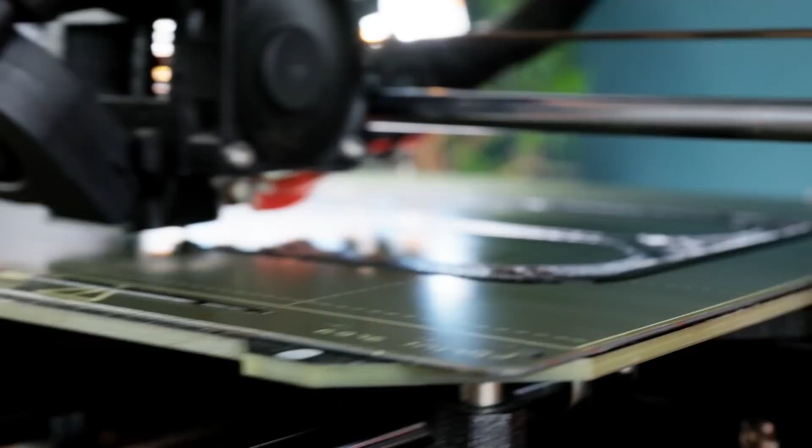Building homemade speakers that can compare favourably to manufactured units that have all manner of built-in digital signal processors, precisely tuned ports, and computer-calculated internal air volumes is hard. Simple boxes just aren't going to cut it anymore. However, 3D printers might be able to help here. Their ability to make complex shapes with millimetre precision is perfect for making computer-aided designs.

But there's a bit of a problem in that thin extruded plastic is acoustically not that great. As it's low in mass, it vibrates and resonates easily, which is awful for sound quality. If this basic enclosure, for example, is measured with a calibrated microphone, we can see this resonance appearing in the 100 to 500 Hz range, and it presents as distortion.

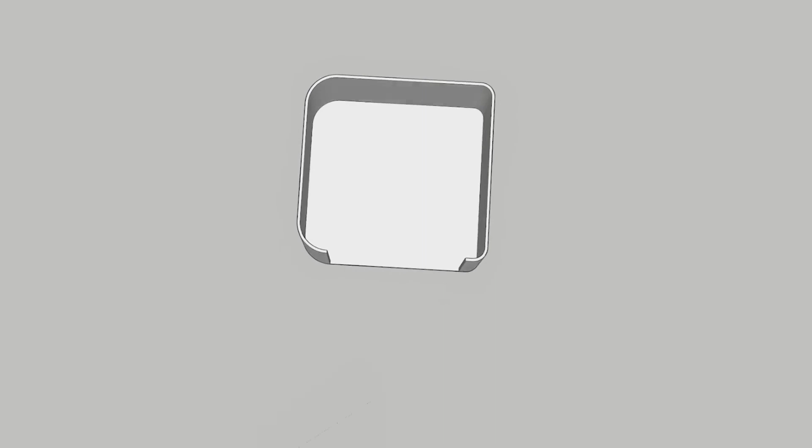Making the chamber walls thicker would of course help here, but it would require a lot of filament and take days to actually print. However, what if we print only a hollow shell and then use it as a form mould instead? Doing it this way results in speedy print times, as the filament only has to be deposited for the shell, with a large internal gap left for a filler material. A cheap and readily available option for this filler material is of course plaster of Paris, which can be added to water to make a paste that sets hard.

It does have a problem for sound applications though, in that it's a very brittle material, giving it a ringing quality a bit like a teacup. This has the potential to sound worse than the plastic alone, but there is a way to fix it by adding PVA glue during the mixing process, which changes this quality entirely, and the difference between the two is night and day.

I believe the addition of PVA creates a microscopic level of flexibility, reducing its brittle nature and making it behave like a much duller sounding material, perfect for using in our 3D printed mould, which once dried is way more solid than our previous version.

These new thick chamber walls reduce the 100 to 500 Hz distortion significantly, which is great, but as the enclosure is so much stiffer now, there's a new problem to contend with: internal reflections. You see, when a speaker driver moves back and forth, it sends sound waves not only forwards towards the listener, but also backwards into the enclosure. An ideal enclosure is supposed to prevent these sound waves from escaping, which our solid enclosure now does a decent job of. But as these sound waves have nowhere else to go, they bounce around and eventually hit the back of the speaker driver again, colouring its output due to the time delay.

This is less than ideal, but adding soft materials to the inside of the enclosure is a good way to dampen these reflections. Here I'm going with some soft automotive acoustic pads, followed by a folded layer of cotton towel and then some sheep's wool, which will all act together to stop the sound waves from being reflected back. And overall, compared to our original thin enclosure, we've gone from this to this.

Further improvements can be had by utilising higher quality drivers, which we'll be diving into later, but essentially this forming technique has made 3D printing a viable option for hi-fi sound quality, which is really exciting because we can now use their ability to make complex shapes to our advantage. And one area in particular that's going to benefit a lot from this is the subwoofer frequencies.

You see, if we replace the enclosure with a long tube, it will keep the rear sound waves contained only until they exit at the other end. Due to the time that this takes, it essentially delays the audibility of these rear sound waves just enough for them to become additive rather than subtractive to the driver's forward sound waves, which makes far more use of the speaker's energy.

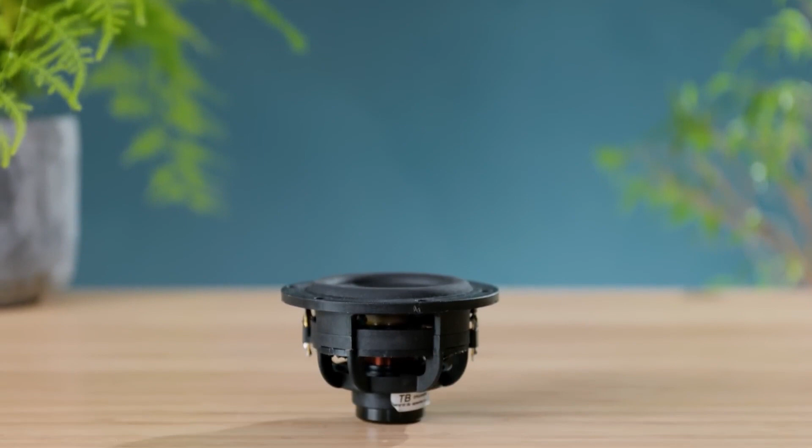One notable subwoofer that's become somewhat of a legend in this configuration, mostly thanks to fellow YouTuber Hexibase, is this 3-inch unit from Tang Band. Despite its diminutive size, it should go down to the low 40 Hz range, which is insane for such a small driver.

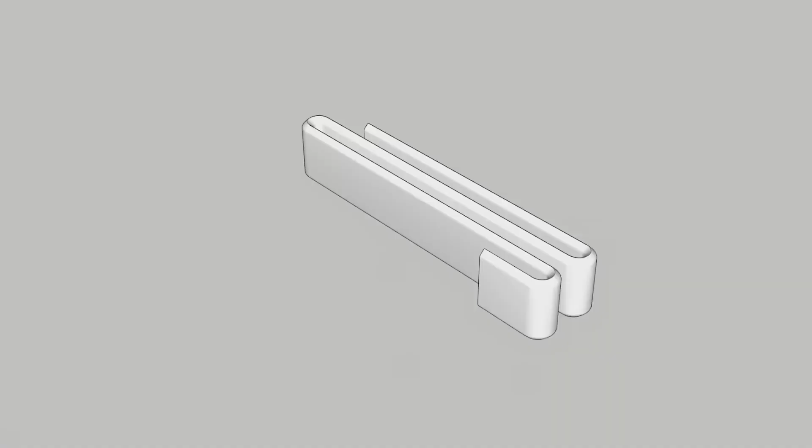Calculating the required dimensions for this to be done properly can be done with a piece of software called HornResp, which can map out the predicted response, allowing us to get two key measurements: the tube length and the area of its cross-section. The 1.4 meter length required for this is rather long, so it can be made into a folded configuration to make it more compact so that we can actually print it off with the 3D printer.

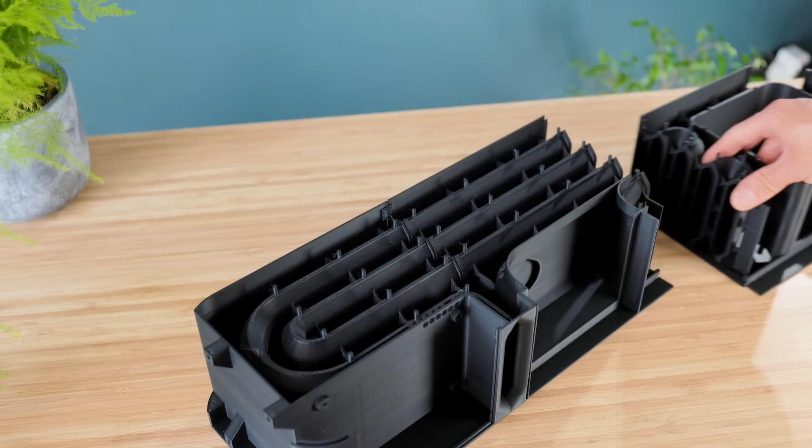Again, in an effort to reduce print times, I'm making this design entirely hollow, with the goal being to fill it with our special PVA and plaster of Paris mix. As it approaches 60 centimeters in height, it's necessary to split it up into 3 individual sections so that it can be printed with the widest variety of printers. And as you can see, I've included a sealed enclosure above it all for a dedicated midtone driver, as the subwoofer isn't really very good at reproducing these tones.

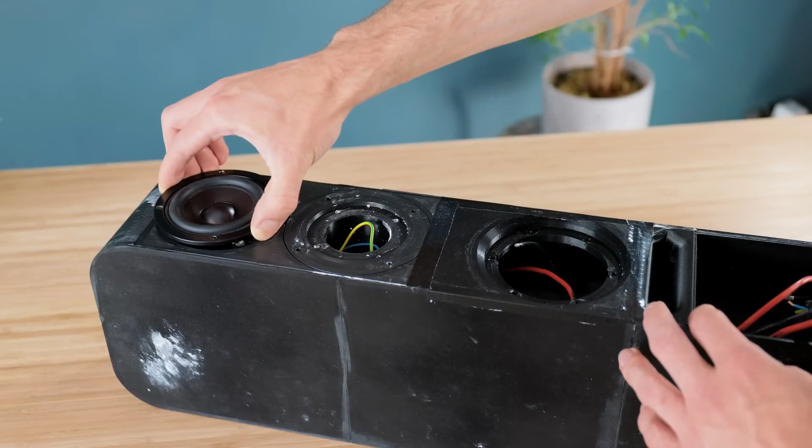Filling this whole thing with plaster of Paris can be done through a hole at the top, though it does need to be knocked repeatedly to make sure that there are no air pockets. This makes thick walls around the subwoofer port and the midtone chamber, and it makes the unit extremely heavy for its size, but it does feel high quality for it and very solid. During testing though, I found that subwoofer notes, while extremely deep, weren't as loud as I'd like.

Now, being me, I'm not satisfied with this yet. I want to take this design as far as we can possibly go to make it the ultimate 3D printed speaker. And to do this, my conclusion is to add yet another subwoofer driver. This doubles the surface area that's going to be providing bass and should hopefully solve the issue. But it does come with its own challenges, namely that we not only need to find space for the driver itself, but also the port has to literally double in dimensional volume. And if I want this thing to remain the same size, that's going to be a massive challenge.

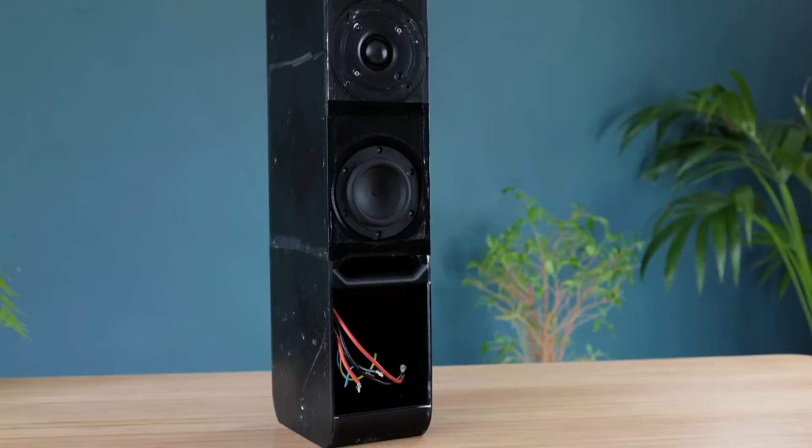But to be honest, the solution is annoyingly obvious. You see, in an effort to have enough room for the plaster of Paris to form good solid boundary walls throughout the speaker, including those surrounding the subwoofer's port, I forgot to ask myself whether they were all necessary. You see, the whole point of this subwoofer tube is to redirect energy, not contain it. As the end is open, its walls really don't have to be as thick as I've made them, because they don't have to hold in any energy, they merely direct it through.

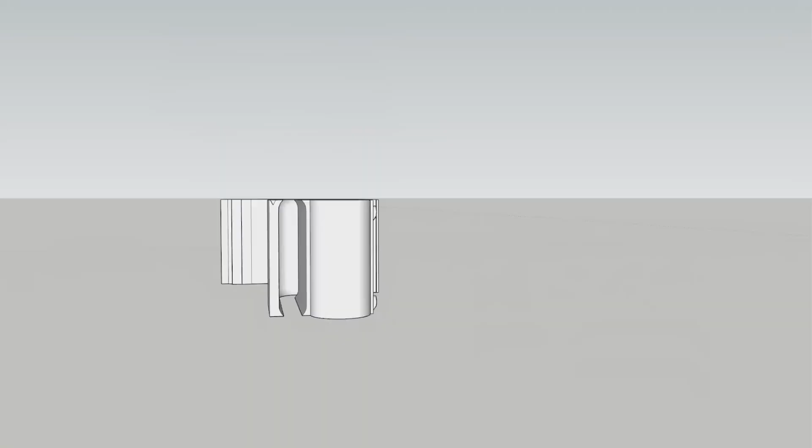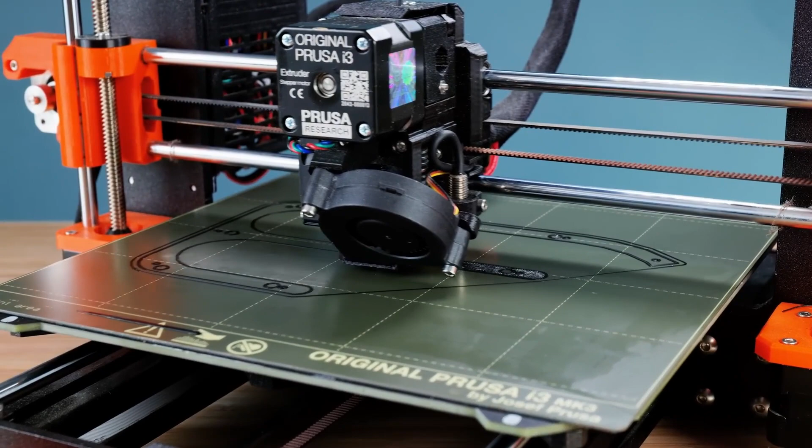With this in mind for the second attempt, I've decided to remove the need for plaster of Paris for the subwoofer's port entirely, and instead have gone with 4mm 3D printed boundaries, which saves just enough space for the now much wider and longer port. The downside is that it consumes twice as much filament and takes twice as long to print compared to the original, so let's hope it's all worth it.

So a few days of print time later and we've got everything printed off, ready to be mounted together. Now this is a relatively simple process due to the way it's been designed and divided up, but we do need some glue. Now this isn't actually for anything structural, it's just to form an airtight seal between the different layers. So let's get to it.

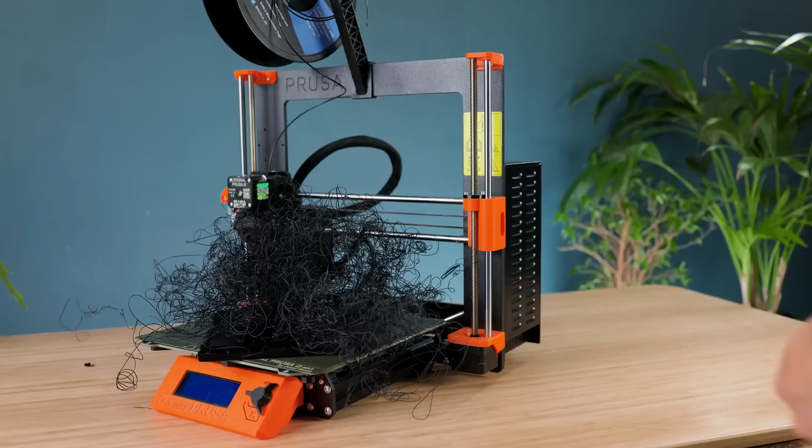Now, time to get gluing. As you can see, the biggest change from the original design is how it's been divided up for the printing process, with smaller individual parts rather than 3 big ones. This has been done to reduce the likelihood of printing failure by them popping off the build plate before they complete, though if you do want to print a set of these yourself, do note that it's still important to clean the build plate and apply some school glue for the best adhesion.

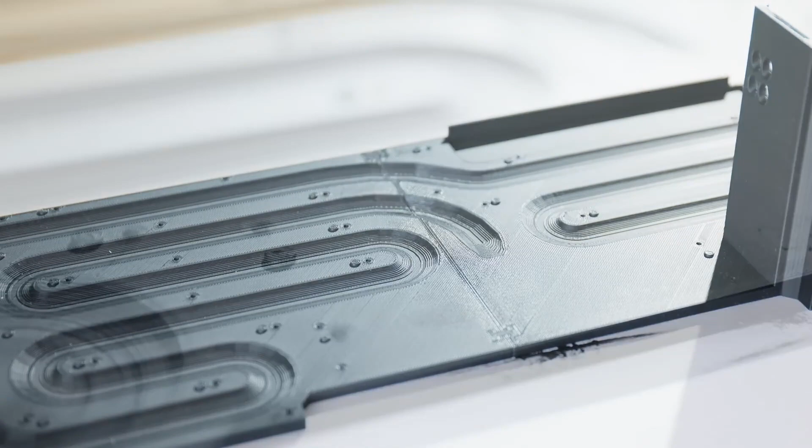Once everything's successfully printed, build platforms 1 and 2 can be glued together first, utilising a couple of H-clips to make sure that they're nice and tight. As you can see, the glue has a tendency to squeeze all over the place, but it's easy enough to wipe away any excess. Now you'll have probably noticed that these pieces have many small discs on them. These are actually centering guides, which line up with the subsequent pieces, making them easy to position accurately.

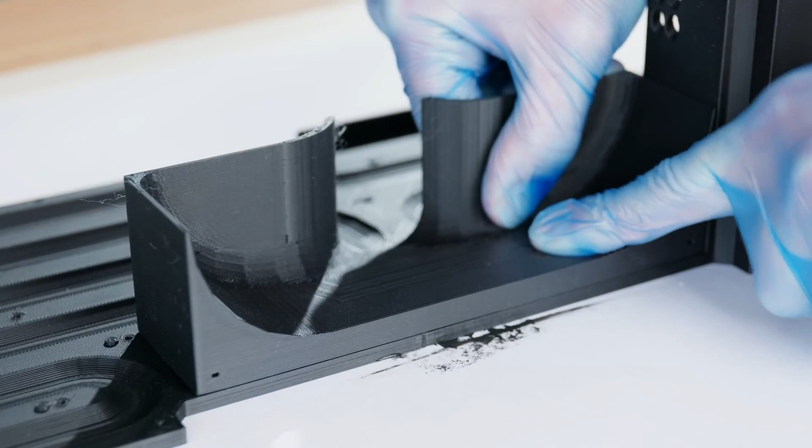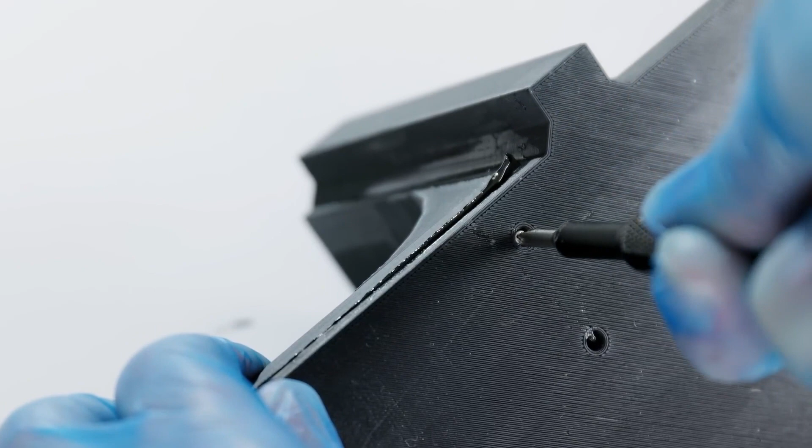Here I'm adding the bottom part of the subwoofer's chamber, and if we flip it over we can see that there are 4 holes beneath it. These are for 2mm diameter self-tapping screws, which allow us to clamp the pieces together. From here the internal air guides can now be added, starting with piece A. This just needs a thin bead of glue along the bottom, as well as any vertical seams it touches. The guides help a lot in positioning it correctly, after which the screws take over.

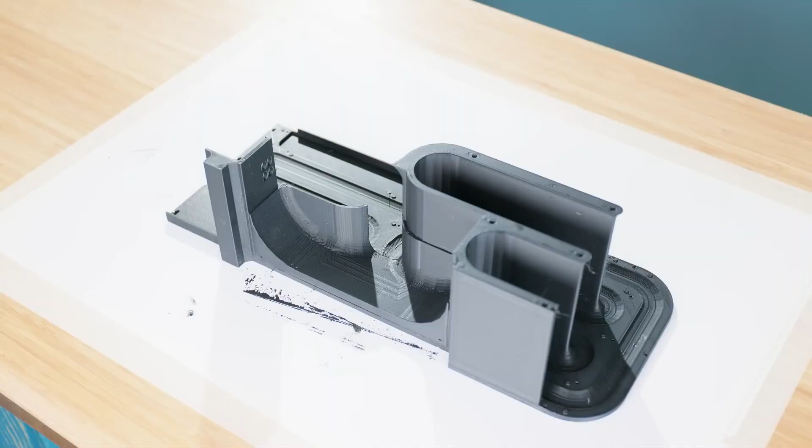It's important to ensure adequate glue here for a tight seam, keeping in mind that any spillover can be easily wiped away. This process needs to be continued with all of the internal air guides, which completes the subwoofer's tuning port, allowing us to move on to the midtone chamber. As you can see, this is the only section that has carried over the hollow forming technique, as it's proven so effective for midtone use.

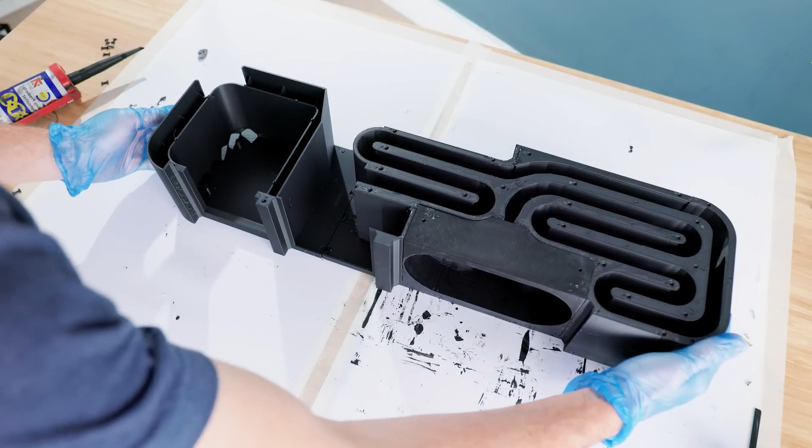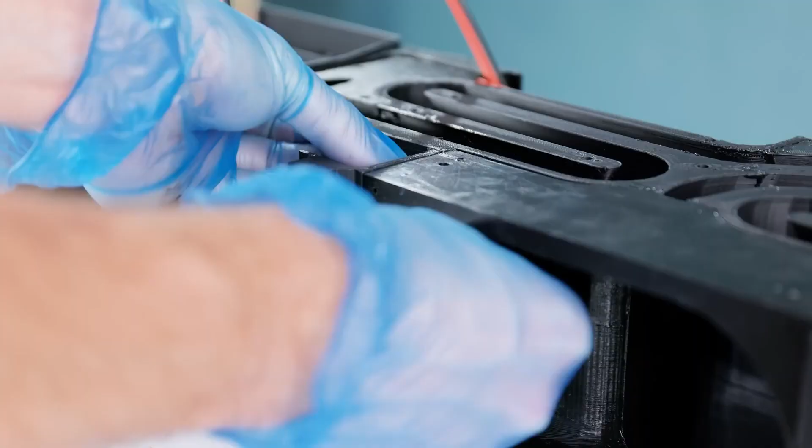For a nice strong link, this final platform can get extra support from the subwoofer's exit port, which, as you can see, has a wiring guide in its top half. There are a total of 4 pairs of wires that need to be routed through this: a pair for the top chamber, a pair for the middle chamber, and 2 pairs for the lowest subwoofer chamber. The holes for these, of course, all need to be sealed up so that no air can pass through.

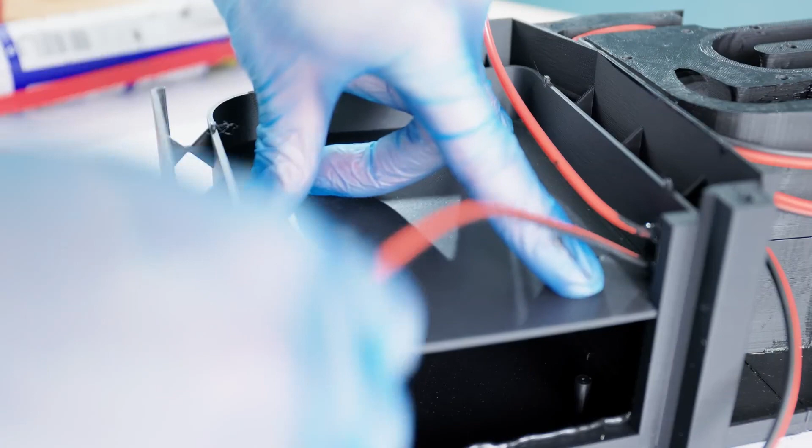With that done, the hollow cavity below the midtone chamber can now be covered, ready for the PVA and plaster of Paris mix in just a moment. But before we do that, we might as well add the chamber's dampening materials at this stage while we have easy access to it. Again, this is just a layer of 15mm thick automotive acoustic foam, followed by a folded layer of cotton towel, and then some sheep's wool. If you can't find any sheep's wool, by the way, loosened rock wool can also be used here, which is something that you can find in most hardware stores.

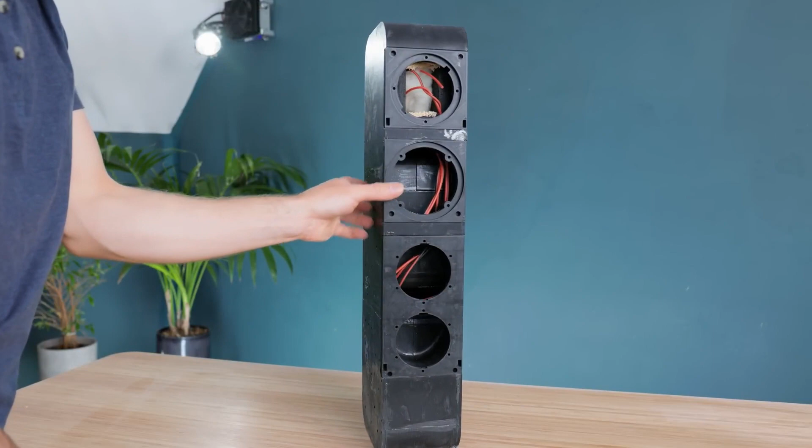All this being done means that we can finally cap the unit off with its top lids, as well as the brackets for the speakers themselves. It's worth noting that these being separate is intentional, as it means that the design can be easily adapted to different speaker drivers. So to finish things off, it's time to make what will hopefully be our last batch of PVA and plaster of Paris.

While plaster of Paris is generally safe, it does need to be respected as it can set quickly and generate some heat while doing so. Make sure you read the safety notes in the video's description before attempting to use it. The quantity required for our pour is 750ml of water that's already been mixed with PVA at a ratio of about 10 to 20%. This can be followed with 1 kg of plaster of Paris powder, which needs to be mixed in gradually.

Once a smooth consistency has been achieved, it can be poured into the chamber at the back, which completely surrounds the midrange chamber with a solid 16mm thick wall. It doesn't take too long for this to set, after which the rear can be closed up with a little cap.

Now technically the enclosure is ready for the various drivers to be mounted, but aesthetically, I think there's room for improvement, especially as not everyone is fond of the 3D printed look, particularly when there are joins that are still visible. But thankfully, there are loads of different techniques that we can utilise to make this thing look really special. To make the joins less of an issue, they can simply be filled and then thoroughly sanded down.

While this can be done by hand, it's worthwhile borrowing a disc sander as it saves so much time and it gives a really smooth finish, ready in fact for some paint. Some plastic primer can be used here first, as it gives a good key for the top coat. There are loads of cool finishes available these days, and I'm going with a textured paint that looks a little bit like metal. A far cry from the original printed plastic, that's for sure.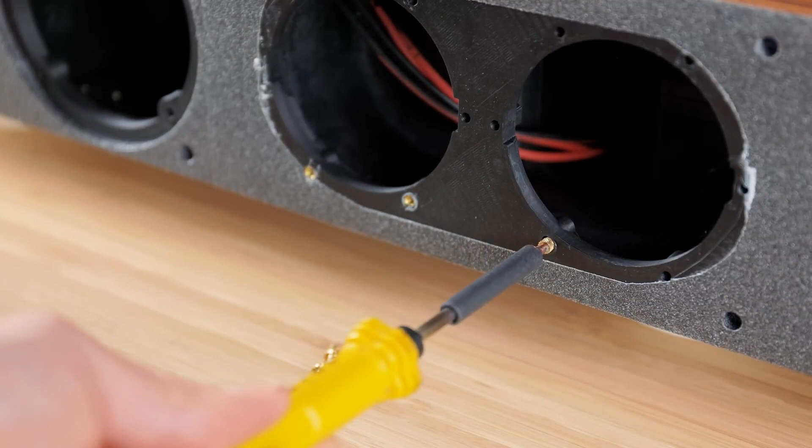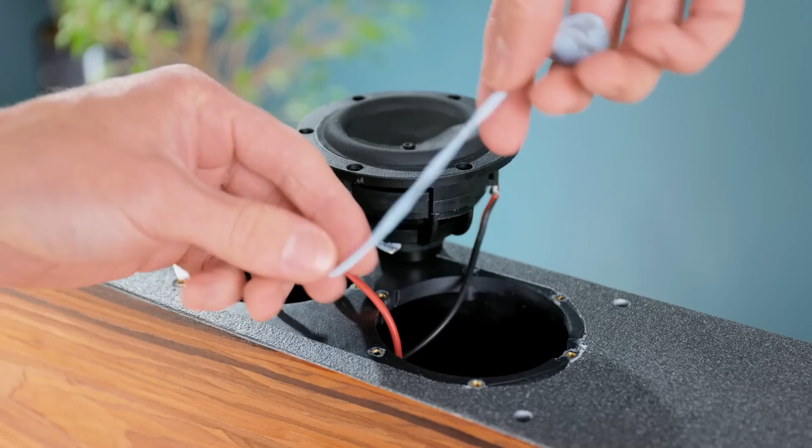To prepare for the mounting of the speaker drivers, the holes for them need some little M3 threaded inserts, which are for screwing them in place. When wiring them up, it's worth noting that the polarity of each speaker needs to be correct, with the red wires going to the positive terminals. One often overlooked but very vital addition is to add a rim of Blu Tack around the edge before the driver gets screwed in place, as this makes an airtight seal for it.

As you can see, they are slightly proud rather than flush, so to make them aesthetically more pleasing, they can be tied together visually with a little bracket. Very nice. So with the 2 subwoofer drivers now installed, it's time to tackle the midtone driver. Choosing a suitable one is somewhat daunting, as there are literally hundreds of different models available, each with wildly varying performance characteristics. In an effort to select the best possible driver for this project, I spent literally days testing various drivers, ultimately settling on this one, which is again a Tang Band unit.

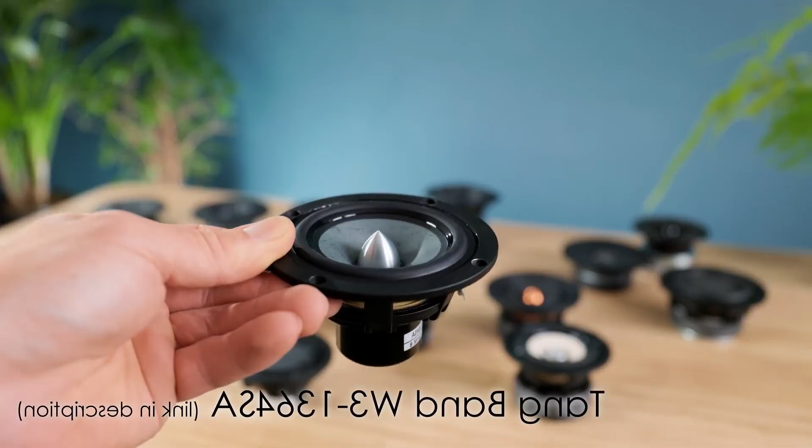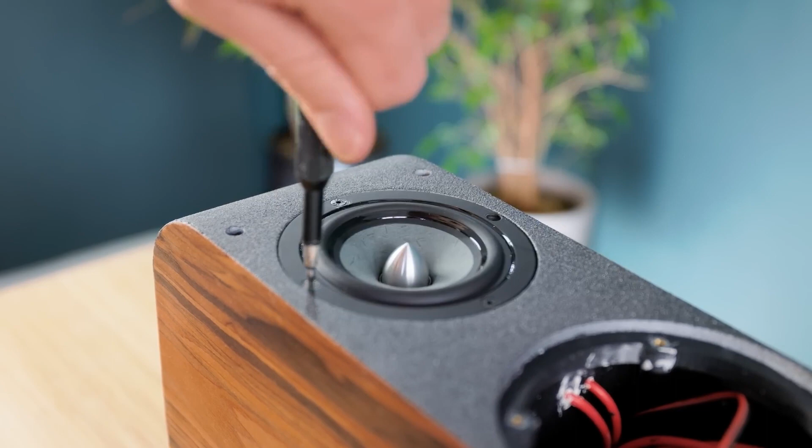It's got a nice smooth character to its sound output with plenty of mid-range detail, and it looks really smart to boot. An amazing feature of this driver is that it can actually cover high frequencies as well, so it can pull double duty as a tweeter, which is great for those on a tighter budget. For those who want the absolute best high frequency detail, however, the design does cater for dedicated tweeters, though they'll only likely be appreciated by the most demanding of listeners, so it's your call whether to include one or not, as the speaker can be printed without the hole.

Either way, with all of the drivers added, it looks really elegant, and it's easy to forget that it is in fact 3D printed. Now, some people might prefer the drivers to be covered, which is why I've included these holes. They're for a grille, which can be made by gluing some threaded steel rods to some mesh, which can in turn be held in front of the speaker with some 3D printed pegs. You could even paint it black for a different look.

An optional extra I've included for hi-fi buffs, by the way, are some side baffles. I embedded magnets for these before the painting process, which allows them to be easily added or removed, and the idea is to provide a smooth surface for the sound waves to spread out on. To describe the effect, it's like the sound gets projected forward slightly with them, but it's only a tiny difference. Still, the option's there for those of you who want it.

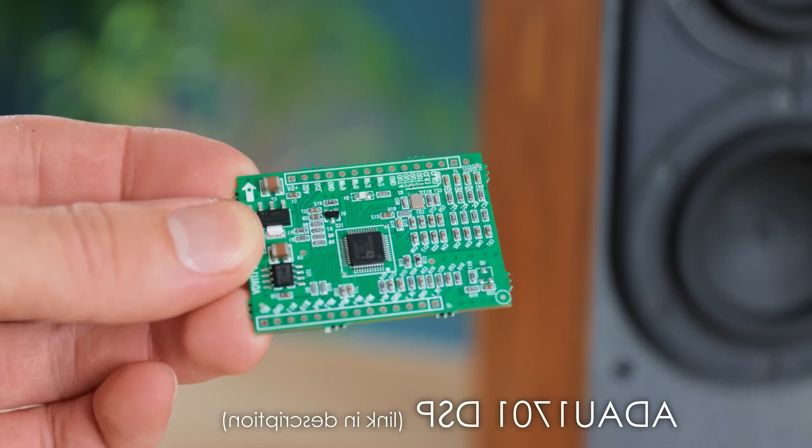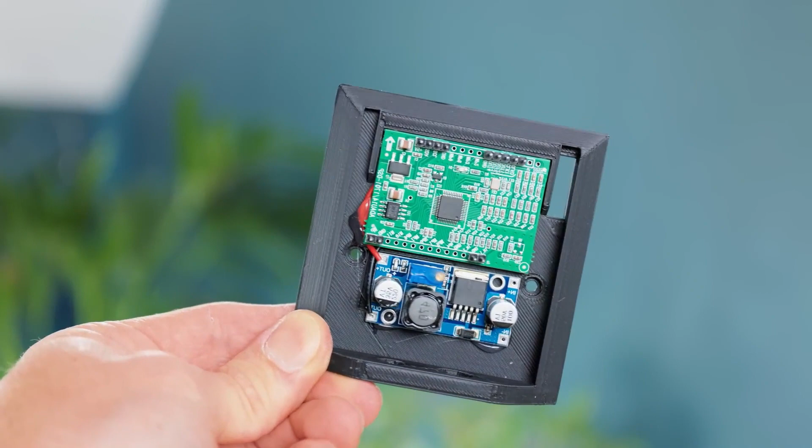Now, to get the very best possible sound from this thing, we're going to need some help from our secret ingredient, a digital signal processor. Shockingly, these are really cheap to buy now and can provide 4 fully programmable sound outputs, allowing it to function as an advanced crossover. To make use of it, we can simply mount it into a little 3D printed box along with a voltage regulator for power.

It's going to get its audio signal from a phono socket that can be inserted here, alongside a DC barrel plug. This essentially takes the audio signal from the phono socket and internally splits it up into 4 separate signals with specific processing for each. As the board can't do any amplification though, it needs to send these signals to a 4-channel amplifier.

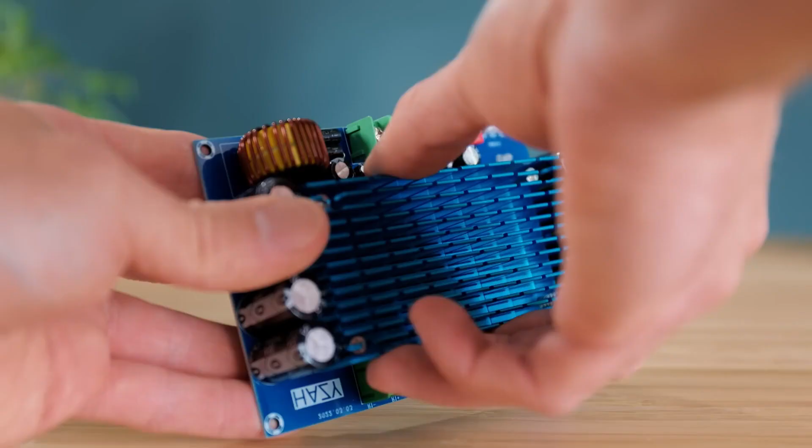The one I have here is a Class AB type, which uses slightly more power than Class D amplifiers, but it has a very low level of output hiss, which can be at annoying levels on so many other amps. There is of course a ready-made chamber for it on the back of the speaker, and each driver wire pair needs to be hooked up to it, being careful of polarity.

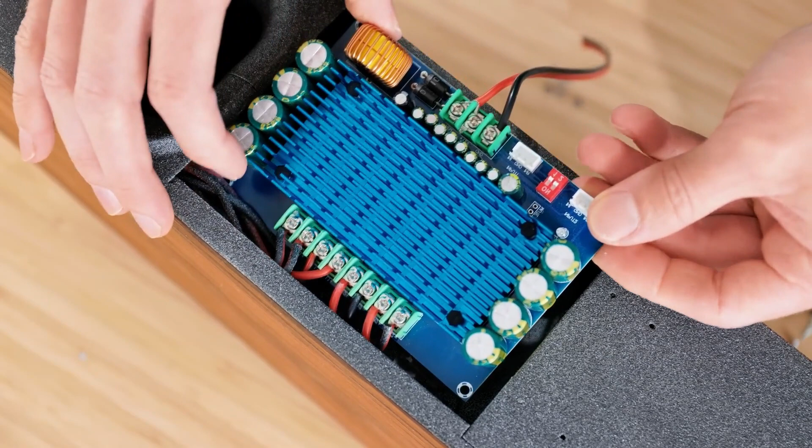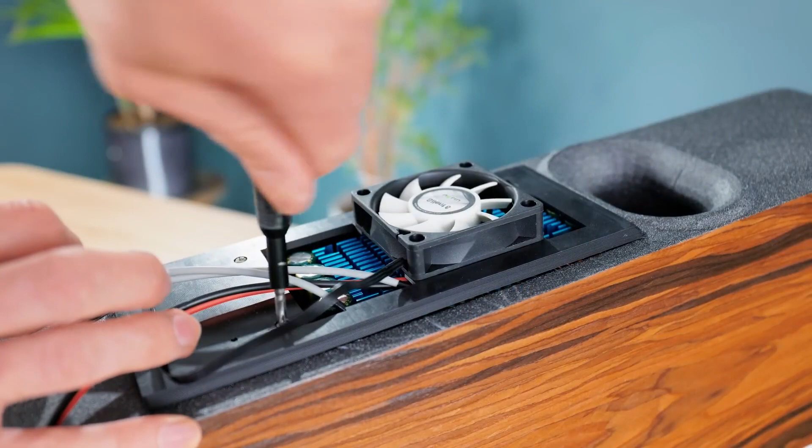To aid in cooling, a little shroud can be fitted on top that features a slow-moving fan. The amp can run passively, but when listening to loud content for an extended period of time, it's likely to get quite hot, and the tiny amount of air movement that the fan provides is all that's required to keep it nice and cool, so it's well worth it.

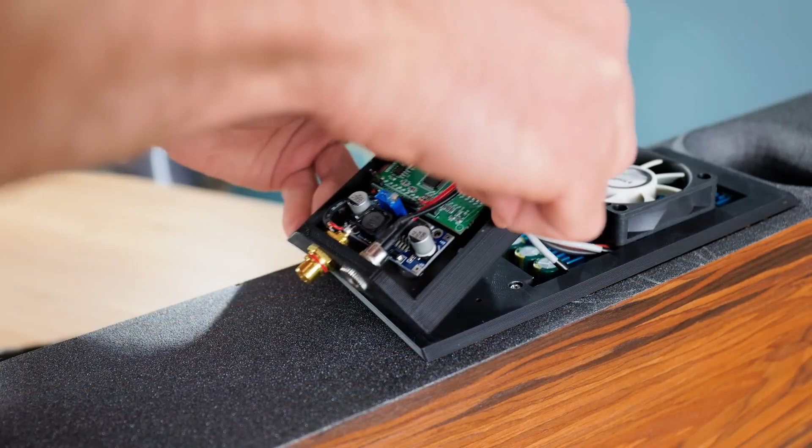The signal processor can be added just below this, and wired up to the amplifier's input wires. Their order doesn't really matter as we can configure them digitally later. The last thing to do is add a cap to cover everything up, which completes the build. Now for stereo, I've made an identical pair, and they look way better than I thought that they ever would, particularly for 3D printed speakers. But do they have the audio quality to match their looks?

Let's find out. After giving them power, the first thing we need to do is program the signal processor. This can be done with a free piece of software called Sigma Studio, which has loads of different filters and algorithms. I've spent many hours making a profile that gets the most from this design, and you can find it with the project's 3D printable files, link in the description.

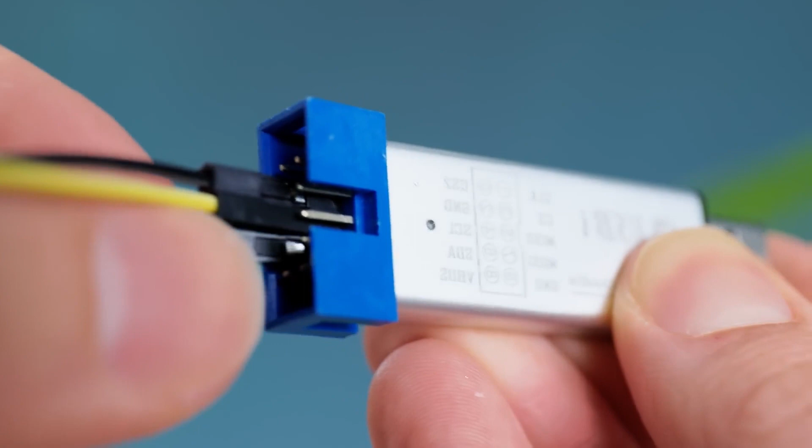To upload it to the DSP, we can simply use a cheap USB programmer. This has 3 pins, GND, SCL and SDA, that correspond to ones labelled on the DSP, so they merely need to be connected together. This allows the profile to be compiled and tested live, though to save it to the DSP itself, the WP pin needs to be bridged to ground, after which the profile can be written to its internal memory.

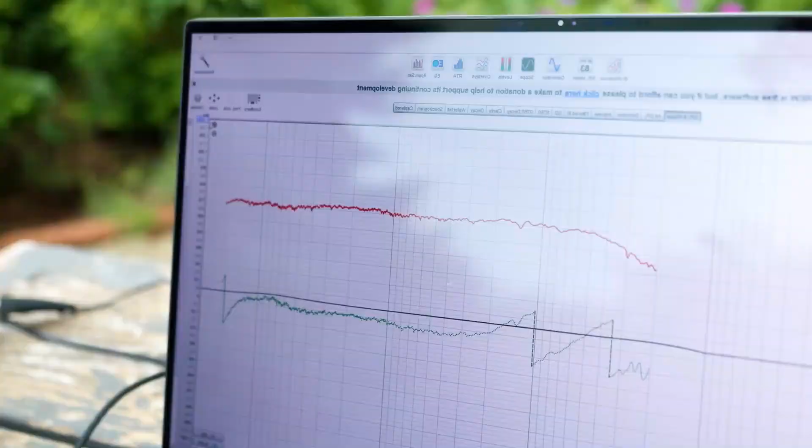Now if you're wondering what the frequency response looks like, I've tuned it to be extremely flat right down to 50 Hz, where it then tapers slightly to 40 Hz. This measurement is without any boundary reinforcement, as it's been done in the open air, but in a typical indoor location with a wall behind them, they measure flat right down to 35 Hz.

This is incredibly deep for such small speakers, and this level of performance is usually only found in floor-standing units or external subwoofers. As these would make excellent gaming speakers, it's a perfect opportunity to show you how vivid their soundstage can be.

Phew! As they're tall and elegant, having them sit either side of a TV is a great alternative to a soundbar, particularly as they'll sound significantly better as well. Here's an example against a much more expensive Bose unit. They can even trade blows with high-end bookshelf speakers as well.

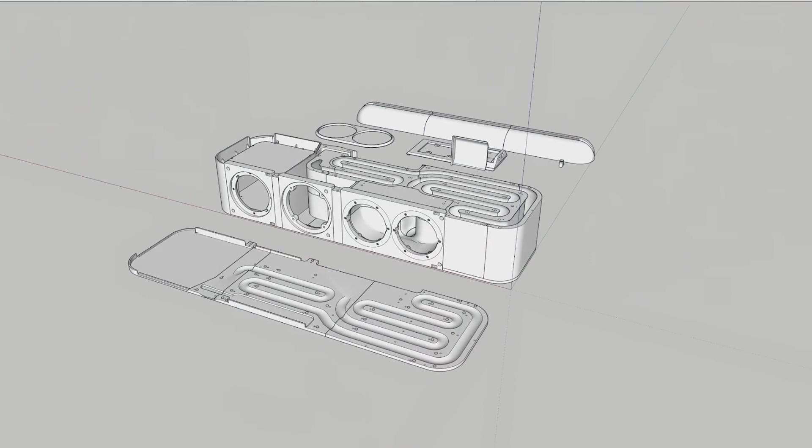Now, I can't offer any warranty or support for them, but as you've seen from the video, they're easy enough to put together, and they're well worth building. It's taken many weeks of prototyping to evolve the design to where it's ultimately ended up, and I'd say it's a massive success. We've made them very competitive to manufactured units, and they look good to boot.